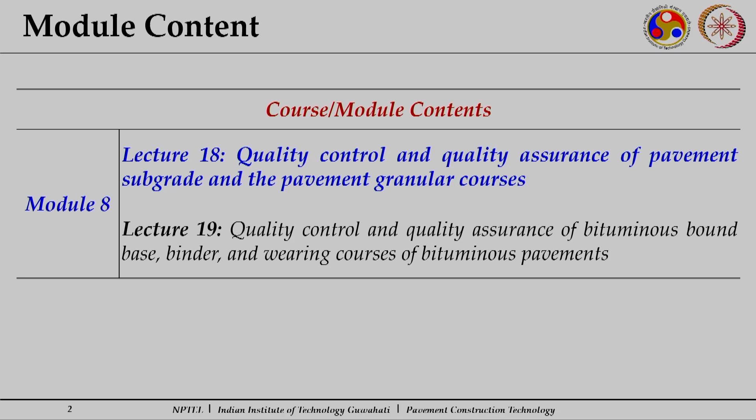This talk will be under module 8, where we discuss various aspects related to quality control and quality assurance to be taken care of during road construction. At the beginning, I would like to acknowledge the use of text, information, graphs and images sourced from various textbooks, codal standards, journal articles, reports, newsletters and public domain sources.

Quality control and quality assurance are very important aspects in any road construction project, or any civil engineering construction project. What is common and fundamental to all road projects, irrespective of their scale or complexity, is the total quality we want to achieve, encompassing every stage from project planning to construction, and up to operation and maintenance. So it is a requirement in terms of the total quality of the project, involving the planning phase, the construction phase, and later the operation and maintenance phases.

The quality of works must be such that the road delivers the intended performance in accordance with prescribed standards or the contract document throughout its design life. So whatever design life we have picked for that particular project, it should be able to meet or deliver the desired required standards. For this, we have many standards already existing with us.

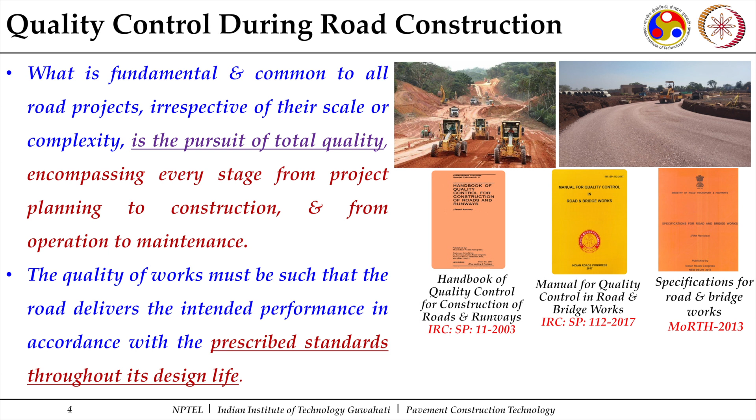We have the Handbook of Quality Control for Construction of Roads and Runways SP 11, which has been amalgamated with the Manual for Quality Control in Road and Bridge Works IRC SP 112. We have the MORTH Orange Book with us, specifications for road and bridge works, and we will discuss some of the quality control and quality assurance aspects. Many more relevant standards need to be taken care of when looking at the total quality aspects of a road construction project.

So ensuring quality in a road construction project is important, so that we are able to provide users with safe and comfortable riding conditions during the entire design life, whether it's 15, 20 or 30 years, and for minimizing vehicle operating cost. If you give a good surface, a good riding quality, it minimizes the vehicle operating cost also.

Ensuring optimal utilization of material resources is also a very challenging aspect nowadays, because all we are consuming is our natural resources. So what are we leaving behind for the generations to come? We need to go for optimal use of natural resources, or we can call them our national resources, while doing these road construction jobs.

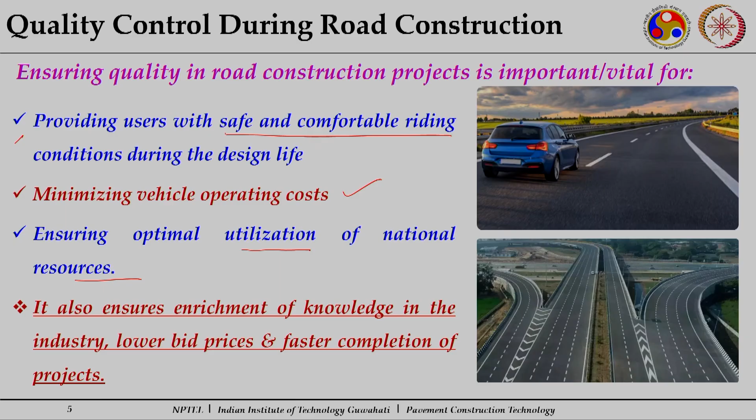It also ensures enrichment of knowledge, because we learn from experience and work with new technologies and materials. This enrichment of knowledge in the industry leads to lower bid prices, as we enhance our knowledge and expertise and bring down costs, and faster completion of projects. We are presently constructing around 30 kilometers of national highways a day, and good total quality management can give us all these benefits.

Now the term comes as total quality management. It is a management approach where an organization is centered on quality, based on the participation of all its members. Specifically in a road construction project, there will be a concessionaire, consultant, authority, and some independent consultants - all these are different bodies of an organization, and all these members should participate.

This aims at long term success through customer satisfaction, because all these are products which finally need to be delivered to users. So it is ultimately customer satisfaction which is there, along with benefits to all members of the organization and society.

So then only it is possible, because the organizations which are involved, and finally the users, all should get benefited. So that means a total quality management.

A total quality management helps us achieve a high quality product or service, which may be a road section as a product, or a service for the road users. It aims to utilize the human and material resources in the most efficient and effective manner to achieve the desired objectives of an organization.

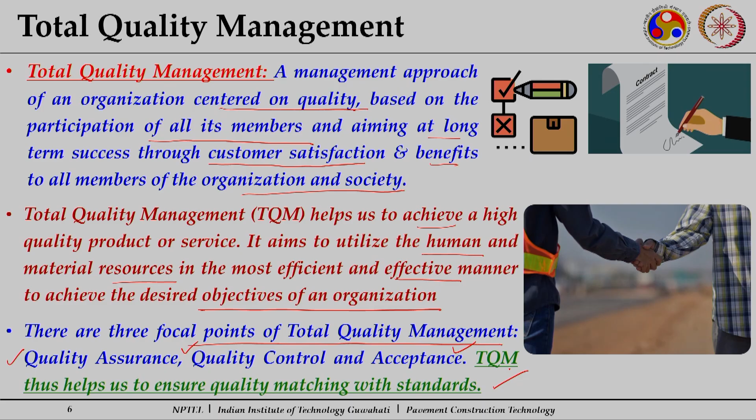Specifically in road projects, there are three focal points of total quality management: quality assurance, quality control and acceptance. Many a times quality assurance takes care of quality control and acceptance also. TQM, total quality management, thus helps to ensure the quality matching with the standards already laid down.

As mentioned, three focal points are there in case of total quality management: one is quality control, second quality assurance, and quality acceptance, whether whatever quality achieved is accepted or not. So all activities pertaining to quality revolve around these three core elements, and the responsibility of different bodies are there for these aspects.

Irrespective of the contracting model adopted, nowadays different contract models are adopted for road construction projects, but mainly in all those different project models, the quality control is specifically taken care of by the contractor or the concessionaire. When it comes to quality assurance, this mainly applies comprehensively to all stakeholders involved in the project - the consultant, contractor, concessionaire, and authority are all in one way or other involved in quality assurance.

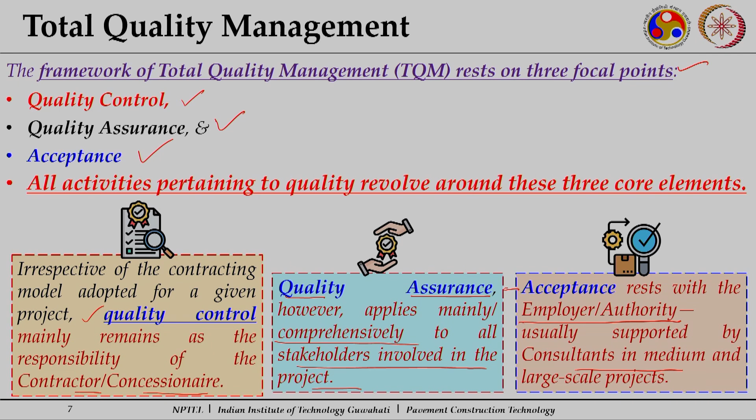Finally, when it comes to acceptance, it rests with the employer and authority, because they are the final authority to accept what product or service has been created, supported by - and for this they can take help of some consultants. We can call them independent consultants, specifically in medium and large scale projects.

Some standard definitions for quality control: quality control is said to be a planned system of activities whose purpose is to provide a level of quality that meets the needs of users - whatever system we develop specifically to attain a certain level of quality, meeting the demand or requirements of users.

Usually the main objective of quality control is to provide an overall system integrating the quality factors of several related steps. So in this quality control there will be several interrelated aspects.

What is this? The proper specification for what is wanted - if you are looking for a road, a national highway, an expressway, what are the specifications you are looking out for in terms of its strength, in terms of its functional requirements. This is one part of quality control. Production, to meet the full intent of the specification - how the production process has to be there so as to achieve those specifications for a particular product or service.

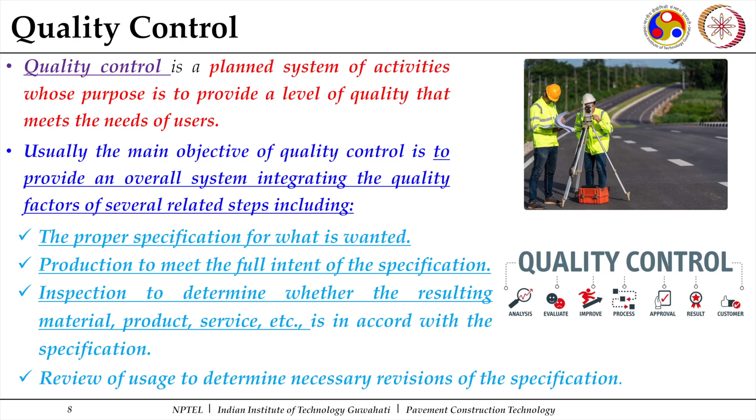Inspection, to determine whether the resulting material, product, service etc. is in accord with the specification. Quality control involves this inspection also, so as to monitor whether the product or service is as per the specifications meant for it. Review of usage to determine - when certain things are put to use, we get a review from users, from different organizations, and on the basis of that review we can look into revision of these specifications also. So these all are aspects related to quality control.

Now when it comes to quality assurance, again this is a planned system of activities whose purpose is to provide assurance - because I need to assure that I am able to get what I am desiring out of it. So activities whose purpose is to provide assurance that the overall quality control program is in fact being effectively implemented - that the quality control program finalized is getting properly implemented or not. This system entails a continuous evaluation of the adequacy and effectiveness of the overall quality control.

It does a continuous assessment of your quality control program, whether it meets the required expectations, with the objective of initiating corrective actions wherever necessary. If quality control programs are not monitored properly, the corrective actions needed in that case must be identified.

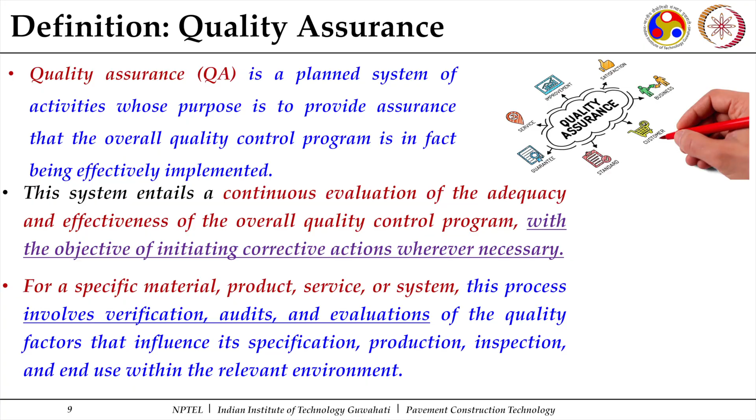For a specific material, product, service or system, this process involves verification of whether it meets the required standards. Audits may be there - internal audits or third-party audits - along with evaluations of quality factors. For example, a road surface can be evaluated in terms of surface regularity, density, and roughness - the different quality factors that influence its specification, production, inspection and end use within the relevant environment. This is the general requirement of a quality assurance planning system.

Now we will discuss total quality management, where some key steps are there. In this entire total quality management, which needs to be followed or taken care of for a road project, there are some important key aspects which we will discuss one by one, and they are well documented in our IRC SP 112 guidelines.

The first is the selection of the class of the quality assurance plan. What class or level of quality assurance plan has to be followed will depend on the kind of project, specifically the level of the project. Based on the level of control and cross verification required, 4 classes of quality assurance plans are defined.

The first one is the nominal quality assurance plan, designated as Q1. It is specifically for rural roads in remote areas, subject to specific approval of the concerned road agency. This is the first category of the class of quality assurance.

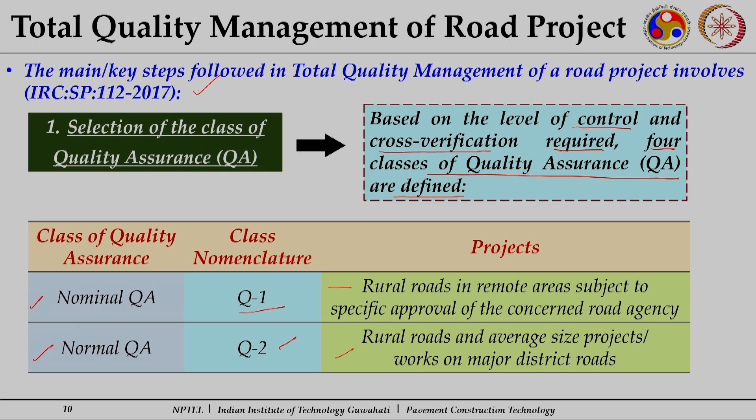Second is the normal quality assurance class, designated as Q2. It is specifically for rural roads and average size projects, or major district roads. Then we have the high quality assurance level.

This is Q3, which is to be followed for national highways, state highways, and coastal roads, as per IRC SP 112. It says for coastal roads, roads in high altitudes, roads in high rainfall regions with average rainfall more than 2000 mm, and large size projects on major district roads.

Then we have the extra high quality assurance level, which is Q4. This is specifically for expressways, tunnels and elevated highways. So first of all, we need to work out what quality assurance level is to be applied for a particular project.

The quality assurance level, or class, needs to be decided prior to the start of project preparation. This is an important aspect depending on the category or type of the project. This class has to be well defined beforehand. However, during the course of implementation, we can move from a lower class to an upper class.

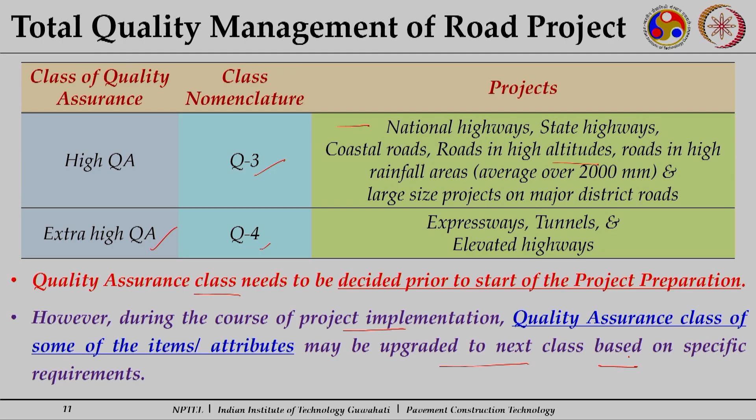During the course of project implementation, the quality assurance class of some items or attributes, specifically some features of that particular project, may be upgraded to the next class based on specific requirements. So certain features may be upgraded to a higher class depending on the requirements.

Now the second requirement under this total quality management is personnel. Here there will be involvement of personnel for both the contractor as well as the concessionaire, and the independent bodies or authority. Both concessionaire, contractor and the engineer consultant are required to engage an adequate number of qualified personnel possessing the necessary knowledge,

experience and exposure to ensure effective quality control. They need to have a given standard of knowledge, experience and expertise to handle different kinds of projects, specifically the variety of aspects in road construction. That is a must to ensure that we get a good quality project or a good quality product.

The competence of personnel involved, in terms of engineers, material engineers or quality control engineers, is important. In addition, the competence of laboratory technicians, especially those directly responsible for conducting the tests, is particularly critical in achieving reliable results. The technicians or laboratory staff engaged in road construction projects should be knowledgeable, with good expertise and experience, so as to understand and conduct the tests in a reliable manner.

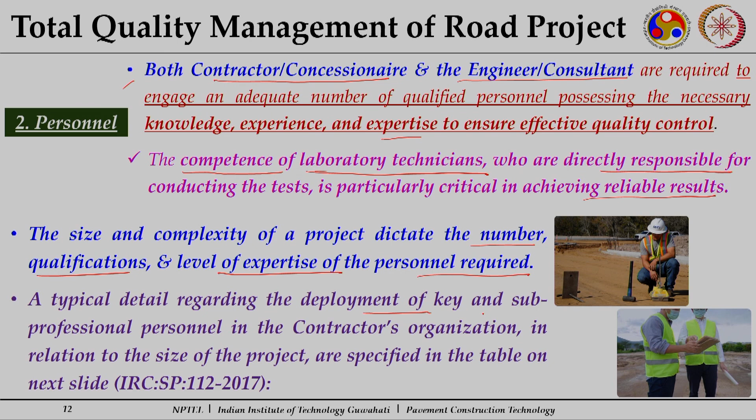The size and complexity of a project dictate the number, qualifications and levels of expertise of the personnel required. Depending on the project cost, a certain number of personnel with specific educational qualifications and expertise is required. Typically, details regarding deployment of key and sub-professional personnel in the contractor's organization are shown in a table, where the requirement is mentioned in terms of the size of the project.

As a typical example, if the project is less than 300 crores, versus greater than or equal to 300 crores, the requirements differ. For the smaller project, one material engineer is required, two quality control or assistant quality control engineers, and four lab technicians. For the larger project, one material engineer is again required, but three quality control or assistant quality control engineers, and six lab technicians.

A typical organizational structure example: under the material engineer, for the smaller project with quality control or assistant quality control engineers, one can take care of earth and concrete works, the second can take care specifically of different pavement courses, and this is further supported by lab technicians.

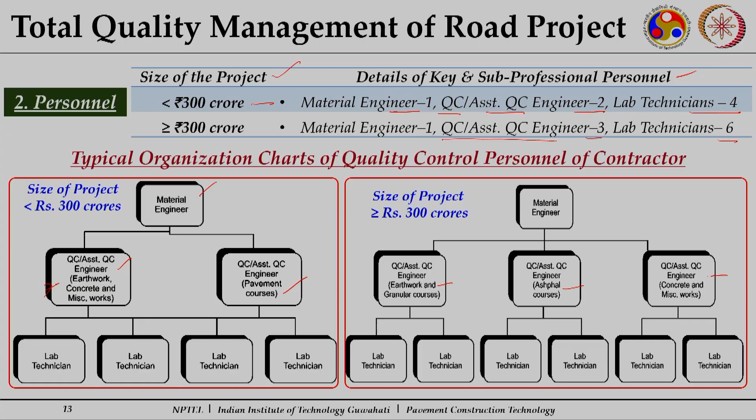When the project is of bigger size, under the material engineer you can designate quality control or assistant quality control engineers for earthwork and granular courses, for asphalt courses, and for concrete and miscellaneous works, each with dedicated lab technicians associated with it. Similarly, there will be requirements in terms of their education, experience and expertise.

Once we have decided the class of quality assurance and the personnel involved, then comes the quality assurance plan which is to be prepared. Quality assurance is defined as all the planned and systematic activities implemented within the quality system and demonstrated as needed, wherever required, well documented and presented, so that everybody can assure at any stage that the quality is taken care of, providing adequate confidence that an entity will fulfill requirements for quality.

This involves the planned activities and how you move ahead at different stages, so that you have full confidence in the final product you are going to achieve. In a way, quality assurance is the sum of quality control and acceptance. The quality assurance plan is therefore a formal document that records the actions to be taken and the procedures to be followed for each stage by each party, and it assigns responsibilities for each party.

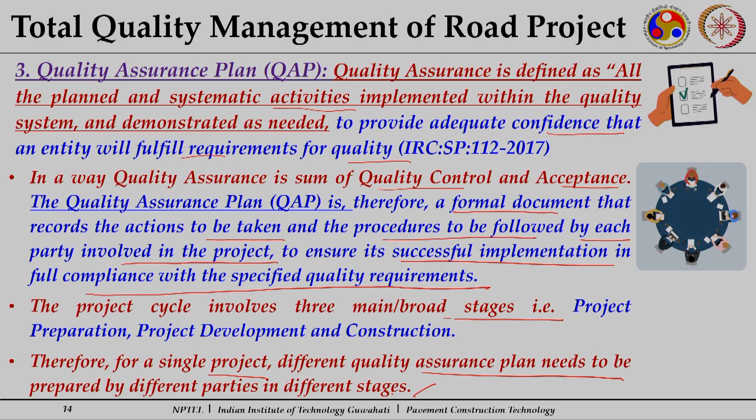The main objective of the quality assurance plan is to ensure a comprehensive understanding of the project requirements - complete understanding of what is required from the product or project, including all features in totality, in terms of all requirements to be achieved.

To assess the importance or impact of environmental factors on quality - it should be well able to assess what effect environmental factors can have on the quality of that particular project.

To develop quality systems that consistently ensure both processes and products meet the quality requirements. We need a system to look into each step, ensuring whatever processes are followed and whatever products are involved in construction meet the specified quality requirements.

To assign responsibilities with absolute clarity - this has to be very clear. Many times it is not clear, and if it's not clear whose responsibility something specifically is, it creates a lot of confusion and ultimately leads to delay and lack of quality in these projects.

To establish effective methods for meaningful evaluation, because in this exercise you need meaningful evaluation to make decisions related to acceptance, rectification, or rejection. At different stages you have to decide whether a particular process or product should be accepted, rejected, or requires rectification - for this we need effective methods on which basis decisions can be made.

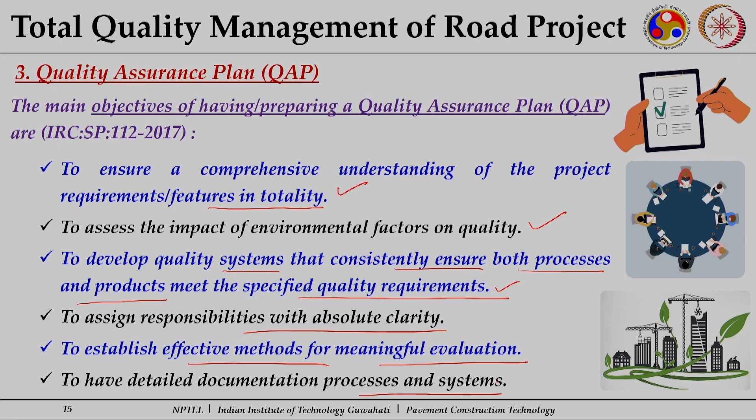To have detailed documentation of processes and systems - this is very important. All these things need to be documented properly, because if not, later on in case of failures or future expansions of the project, this information is very important. If not documented properly, it becomes difficult at later stages.

Once the quality assurance plan has been prepared for the different stages and the role of different bodies identified, then we go for the quality requirements - what requirements are needed, or we need to lay down specifications, and specifications for what?

Different products may be natural products, factory manufactured materials, or specialized items. For every product - say subgrade soil - I need specifications of what I want from it. If I want to use material in base courses, what are my specifications for that material? If I want to use a binder like bitumen, what are its specifications?

Bitumen is a factory manufactured material. The materials used in road construction can be broadly classified into 3 categories: natural materials like soil, sand, gravel, stone, etc.; factory manufactured products like cement, bitumen, and steel produced at a dedicated facility; and specialized items, like the crash barriers you see on roads, which serve one particular purpose and are related to road construction projects.

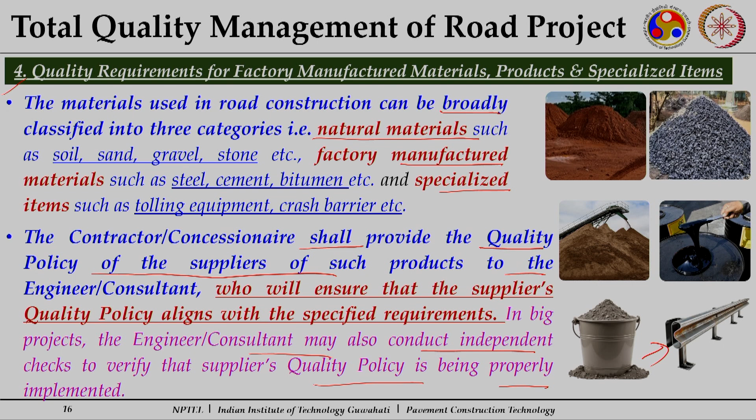In big projects, the engineer consultant may also conduct independent checks to verify the supplier's quality policy, because one is what is documented and provided by the contractor, and there may be certain independent checks at the facility itself. Say a binder producing plant, a modified binder producing plant, or a facility where crash barriers are produced - there we can make a check, have a visit, to ensure whether the quality policy which has been submitted is properly implemented or not.

For these specifications, we need to ensure they are there, so field laboratories are to be equipped specifically related to the specifications which are laid. If you have laid certain specifications, the laboratory should have those testing facilities to check for those specifications. A field laboratory equipped for carrying out most of the tests specified for natural materials and factory manufactured materials is required.

There may be some specific tests which may not be possible, or it may be very costly to establish those kinds of facilities, specifically at the field. In that particular case only those can be omitted, otherwise we prefer to have most of the facilities available at the field lab to ensure the quality of the products.

Suppliers and manufacturers must provide details of testing requirements for their different products, so as to meet the codal requirements which are always there to support. Individually, the manufacturers also give their guidelines or recommendations for their projects.

Availability of site testing facilities is to be checked and ensured, because there are certain things which need to be done at the field - what facilities are available is important to ensure these requirements. Material quality has to be verified through manufacturer or third party laboratory tests, or by witnessing the test.

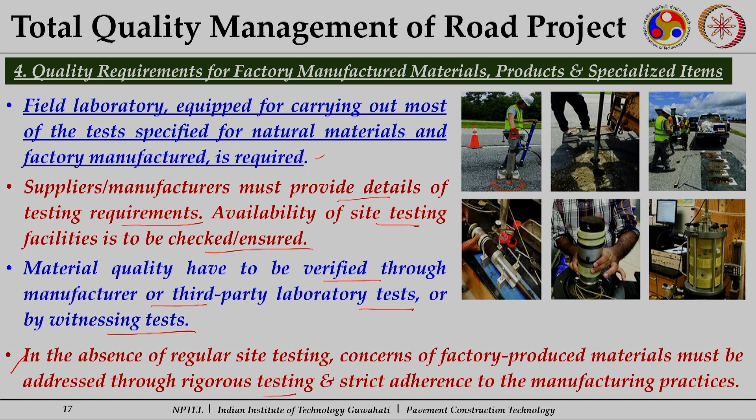Normally this is done - you can witness certain processes which are ongoing there, or you can do it through a third party. In the absence of regular site testing facility, or if there is not an adequate facility, concerns of factory produced materials, specifically like cement and bitumen, must be addressed through rigorous testing and strict adherence to the manufacturing practices. There we need to have strict adherence to whether they are following the manufacturing processes as per standards or not.

For big projects we will always push for this, but even for small projects it is very important to have the basic facilities. Now the fifth step comes up in terms of the laboratory setup - this is again a backbone of any particular road project.

Quality control requires systematic testing of materials, processes and workmanship at various stages. Workmanship matters because of how you produce and lay things when manual operations are required - for example in construction of subgrade courses, or when working on production of granular courses, workmanship is involved. So we need to ensure through regular testing of materials that the processes followed, for laying and compaction, are as per the required standards.

The contractor needs to establish an adequate number of field laboratories, because the project may be big enough and the plants may be located at different sites. So we need to have an adequate number of these facilities present at the project site, equipped in accordance with the requirements. These requirements are well stated in our MORTH specifications for road and bridge works and the other standards to be followed under that particular road project.

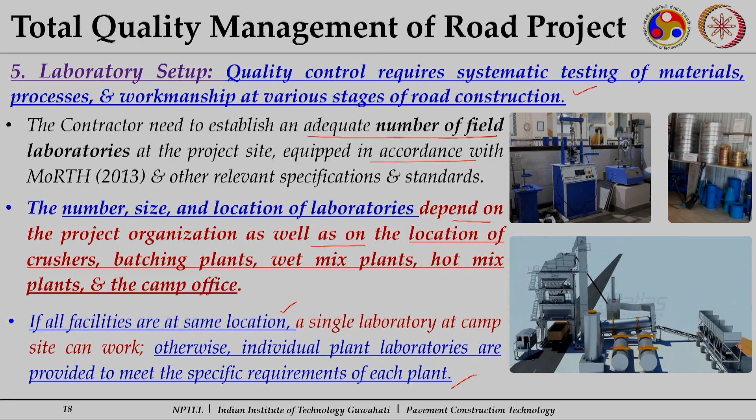Otherwise, individual small plant laboratories are provided to meet the specific requirements, because what you are producing at a wet mix plant, your laboratory setup should be able to ensure the quality of that particular product from that plant.

Mainly it is the responsibility of the contractor to establish test laboratories. However, in projects with multiple packages, where different sections are handled by different contractors, the employer or authority may establish a central laboratory at some suitable location, enabling the engineer to conduct tests on all materials and mixes. So this can be another part.

A field laboratory is the primary safeguard of quality control. It is very important how well it is equipped. As mentioned earlier when looking at personnel for these projects, lab technicians play a very crucial role. Along with skilled lab technicians with experience and expertise, we need a good lab facility. So it is the primary safeguard of quality control.

Its infrastructure and equipment, what facilities we have, what level of facilities, plays a crucial role in the quality assurance process. So there are certain important aspects of field laboratories, like the layout and plan. The layout should be such that it can accommodate different equipment, because you have equipment for different products, for binder, cement, mix, aggregates. For different products you will have different sets of equipment, accommodated in a proper manner, providing a good efficient working environment.

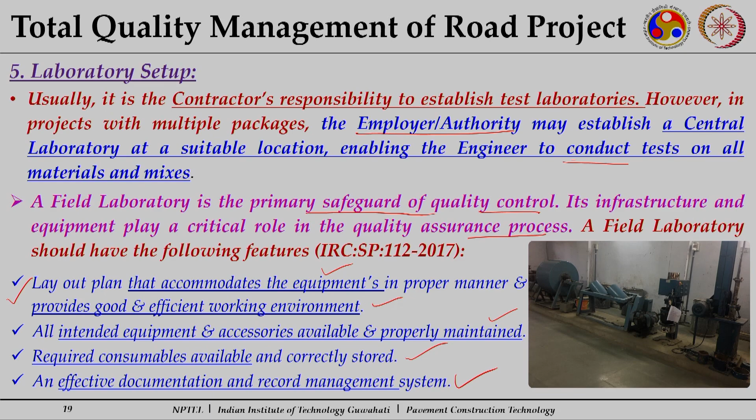In the field laboratory, testing equipment needs to be calibrated, as there are different components and equipments requiring regular calibration. So the sixth important aspect in total quality management is calibration of inspection, measuring and testing equipments. Calibration is the process of comparing the measurements obtained from an instrument with those of a known standard, so as to establish a relationship between the equipment's indicated values and the true values of the measured quantity.

This is very, very important. We have load cells, dial gauges, balances, thermometers, and density gauges, all of which require calibration.

They need to be regularly calibrated. In road projects, a wide range of equipment incorporates measuring devices such as proving rings, dial gauges, temperature gauges, load cells, weighing pads, scales, sieves, and nuclear density gauges that demand calibration.

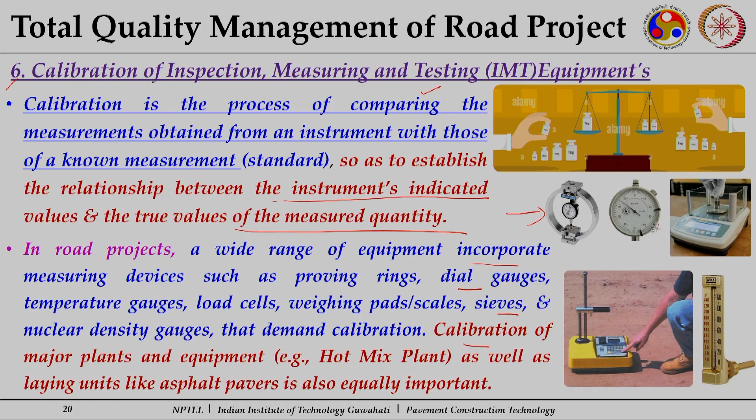Calibration is not only required for these small components, but also for hot mix plants and wet mix plants, so as to give the desired uniformity and homogeneity of the mix. These plants need to be calibrated, and even the pavers need to be calibrated.

Calibration of major plants and equipment, hot mix plants as well as laying units like asphalt pavers, is equally important, because the sensors of the pavers need to be working well in terms of temperature. This demands regular calibration. Once you have a good facility with proper calibration, there is a regular requirement of inspection and testing, which forms part of your quality assurance plan. All information related to inspection and testing will be clearly identified and mentioned there. A good inspection team plays a vital role in assuring the quality of a project.

As mentioned, if you have a stone quarry producing aggregates, there at that stage of production, then when reducing it to different sizes using aggregate crushers, and when it is processed in certain plants, different stages are involved. So the primary objective is inspection and testing at these various stages.

This inspection and testing at various stages ensures that all materials incorporated into the end product meet specifications. We have specifications for aggregates, for binders which may be mixed, and specifications when these are combined together. So investigations are required on individual products and on the end product, which may be a combination of these different products, so that finally they meet the quality requirements.

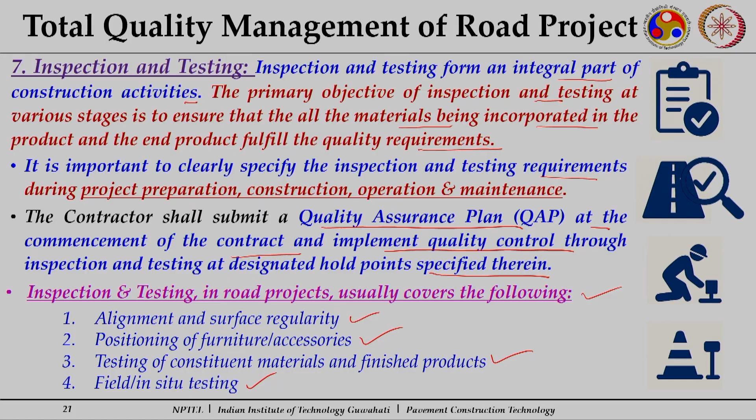This involves both field and in situ testing. There may be certain project materials which require field testing - we ensure compaction in the field, we ensure moisture content in the field. These are certain parameters which need to be ensured in the field, that is, in situ testing.

Now, information arrived at from this field testing and evaluation needs to be properly documented and communicated, well disseminated among the different bodies. This is another important aspect. As I mentioned, later on if some information needs to be retrieved, say if suddenly some fault is observed, we can look into the documentation of what was there during the field inspection and testing.

From there we can draw information to look into any specific failure, or if there is some expansion of the project required, then also we need to be well aware of the existing products. So documentation is involved in the process of planning, design, and reviews.

At different stages we keep reviewing procurement of different materials and products, storage of materials, issue of materials at what stages, plant and machinery operations including temperatures and hours of operation, conditions of operation, any changes encountered, amendments made, and any specific approvals taken in due course of time for certain observations.

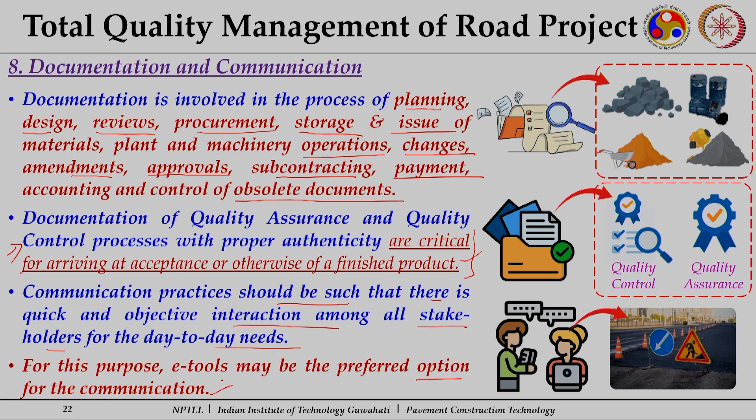Then comes statistical analysis, because from field testing we have well documented information. We need to work out, compare, and evaluate the findings of those investigations. Now, variability of materials, workmanship, and construction process is quite common in road construction jobs, similar to any manufacturing process.

This is because bulk quantities of materials are required. There will be changes in the sources of materials, changes in workmanship, and wear and tear of machinery involved. So some variability is expected to arise.

Adding to the variability of materials and processes, since processes also change under different conditions, there exists variation in testing results from measurement errors as well, such as with respect to calibrations, and even some in-situ field measurements may involve errors. On the basis of these results, we need to decide whether a particular product is as per our specification or not.

Acceptance procedure is therefore required to factor in variability. That acceptance process should be such that it takes care of the variability which is actually expected at the field, that is, variability of test results, or in other words, statistical analysis of the test. So here comes into picture, we need to use statistical tools to analyze these results considering the possible variability that can be there.

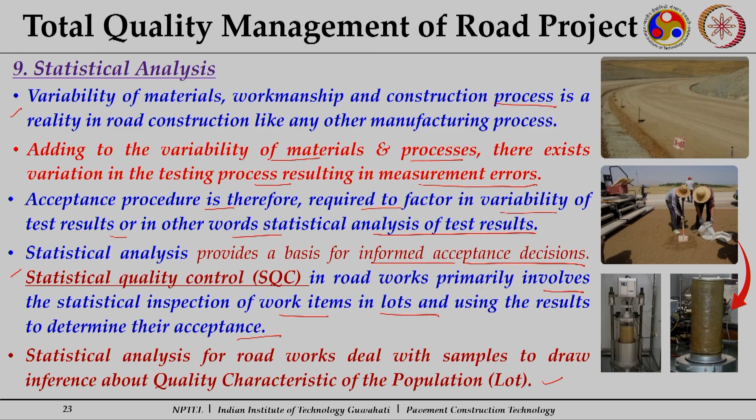Statistical analysis for road works deals with samples to draw inference about quality characteristics of the population. A bigger aspect may be a lot of a day's work, and there may be smaller aspects in terms of subsections of that day's work. Once you have this statistical information, on the basis of that we work out whether the work can be accepted, rejected, or needs to be rectified.

Material, product or specialized item, whatever is being produced in a road construction project, whether received or manufactured on site, as well as any work carried out on site, must ultimately be either accepted or rejected, on the basis of the statistical analysis which we did.

Rejected work may be reworked to meet the acceptance criteria, and there should be some scope for this. If we find that certain works can be reworked, I will give you some examples in the coming slide, where that particular work can be allowed for rework to meet the acceptance criteria.

The acceptance rejection process typically involves identification of attributes on the basis of which you decide. For example, if I am laying a sub-base course, I will decide on the basis of permeability, density, or moisture content. So the attribute on the basis of which acceptance and rejection has to be made needs to be worked out, along with the variable quality characteristics for acceptance, that is, what should be the variability which is allowed.

Selection of the lot, which particular lot of work we do the sampling for, testing which is to be done, statistical analysis which is applicable, and then finally the acceptance and rejection. So these are the simple steps which need to be worked out.

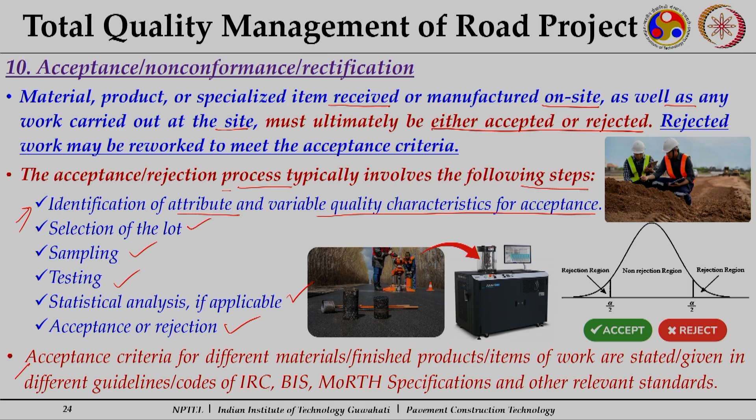The acceptance criteria, the limiting values, the attributes and their limiting values are well stated in many standard guidelines along with the project documents. We have the IRC documents and MORTH guidelines, which state the requirement of different attributes that need to be ensured for different works of road construction.

Under that, what can be the different categories? One is rework to meet the acceptance criteria, where certain works may be modified or enhanced. For example, a granular course may not have achieved the required density. In that case, it may be loosened again, water may be added, and it may be recompacted to achieve the required density. This is one way of reworking to meet the acceptance criteria.

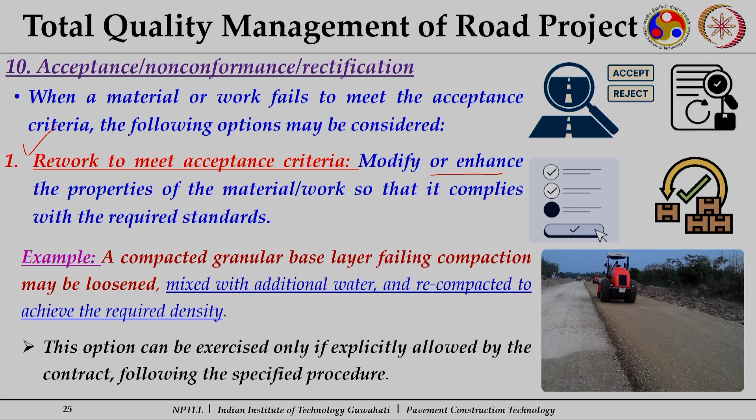If the requirements are not met, the properties of the material may be modified or enhanced so that it complies with the required standards, and this can only be done as per standard procedures and with the acceptance of the engineer in charge. Second, there are certain works which can be accepted, if they fall short of quality, with some reduction in the payment for it.

This is a certain aspect where we say accepted with reduced pay factors. There is a particular requirement that if the material cannot be reworked and has to be accepted, then it can be accepted with a reduced pay factor. We will further discuss this when we talk about quality control for bituminous works.

Regraded for alternate use: whatever material you are using in one particular course, if it is not found suitable, it can be put to some other use. So that can also be explored, using the material for a different purpose after necessary corrections if permitted. For example, a material for a main carriageway, if not found suitable, can be used for a service road or any nearby facilities which are developed.

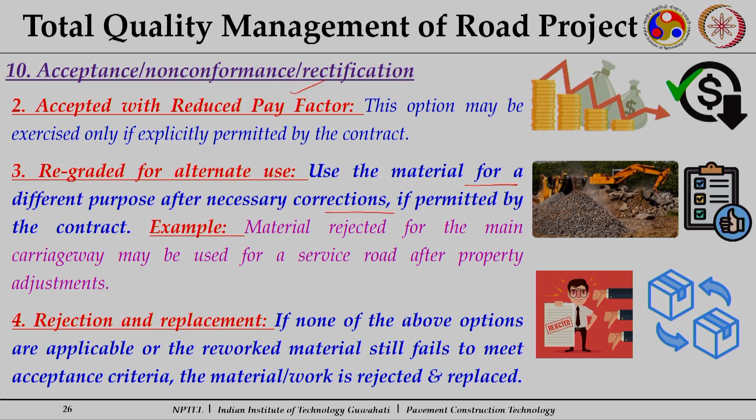And otherwise, rejection. If the material is not at all found to be acceptable, it needs to be rejected and replaced if it fails to meet the requirements. So these are the different aspects.

In some cases, after this there may be a requirement of a third party quality audit, which is an independent review to be carried out by an external entity, a separate firm or group of experts, to assess how effectively the key areas of project quality are being implemented. This ensures that whatever has been laid out in the quality assurance plan has been adequately followed.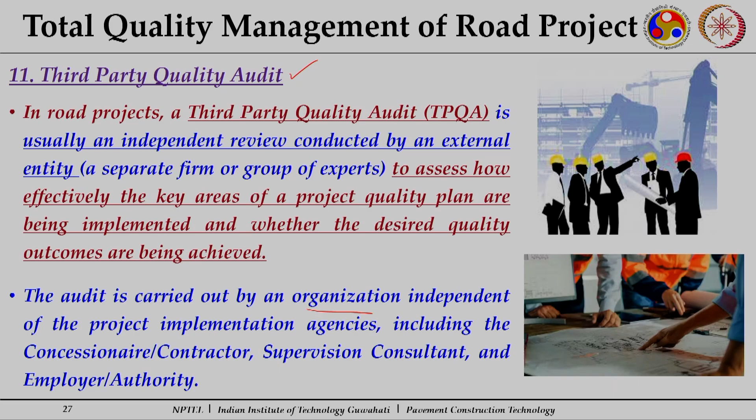The audit is carried out by an organization independent of the project implementation agencies, including the concessionaire, contractor, supervision consultant, and employer authority. So it should be a different agency compared to those already involved.

This will help assess the work, in addition to identifying faults with the contractor. So it is essentially an overall assessment of the work, which is aided through the third party quality audit.

It also serves the purpose of checking compliance with safety, occupational health, and environmental requirements, in addition to the quality of the works, because these are also important aspects that need to be taken care of. This third party quality audit can be taken up on a case-to-case basis, depending upon the project size and complexity.

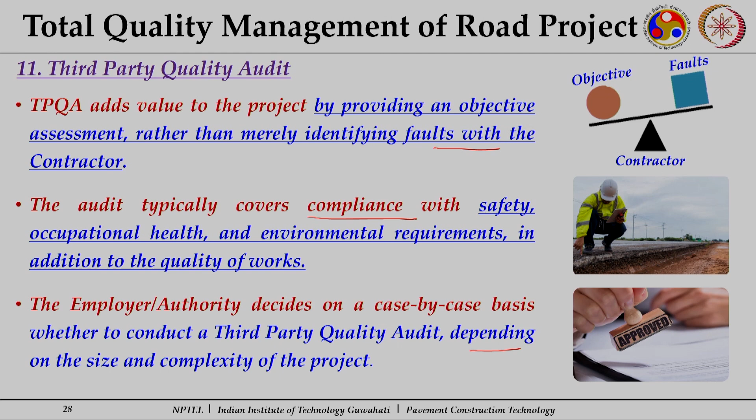The last aspect under total quality management plan is safety, health and environment. These considerations are very important because they involve construction workers, road users, and nearby communities, both during and after construction work. Proper attention to safety, health and environment not only protects people and property, but also contributes to the overall quality, which is what we expect from a road project.

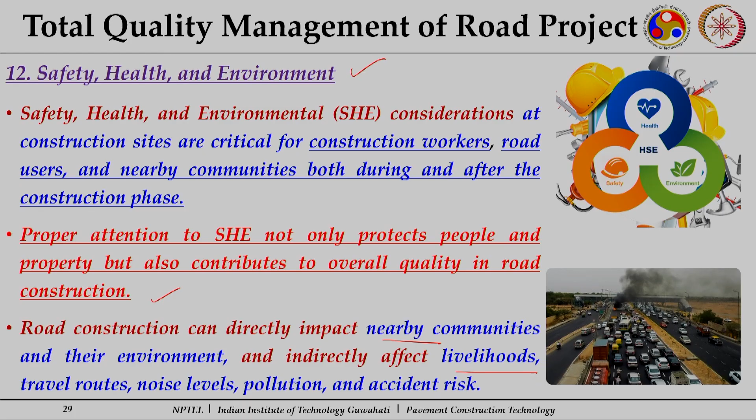It can directly affect nearby communities and their environment, and can indirectly affect livelihoods, travel routes, and cause noise pollution and accidents. So there may be direct and indirect effects of road projects, contributing to three aspects: safety, health and environment.

Environmental challenges may arise when new projects are constructed, such as concerns related to soil erosion and landslides. Even changes to water courses may occur, along with disruption of natural habitats and vegetation. These are the environmental related concerns that are there.

Maintaining high standards of safety, health and environment at work sites is therefore important, as we have seen specifically in the case of plants, like hot mix plants, and how we take care of primary and secondary dust collectors to protect the environment.

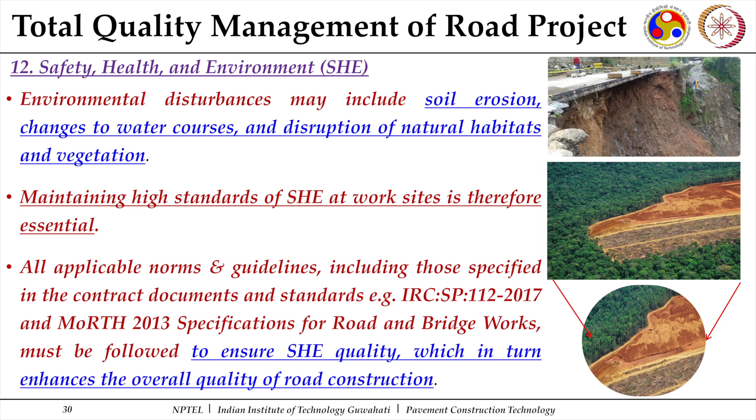All applicable norms and guidelines, including those specified in contract documents and already existing in our MORTH guidelines or IRC SP 112, need to be followed in addition to what is given in the contract document, so as to ensure safety, health and environmental quality, which overall affects the quality of the road construction project.

So this is all for today's lecture, where we have discussed the key aspects related to total quality management. In the next lecture we will proceed with the quality control aspects of subgrade and granular courses. Thank you so much.